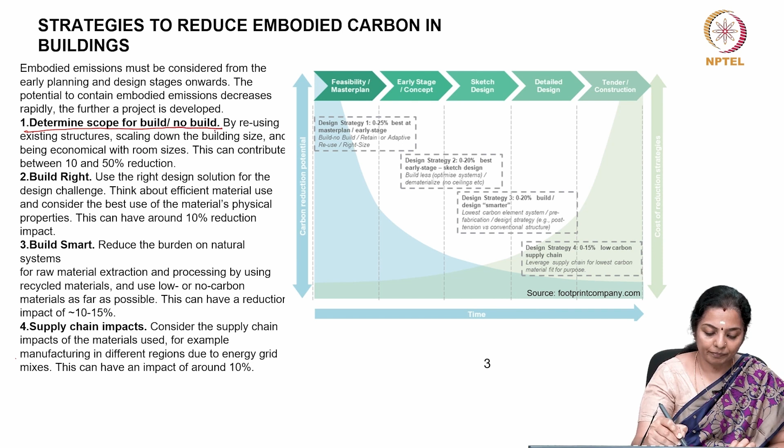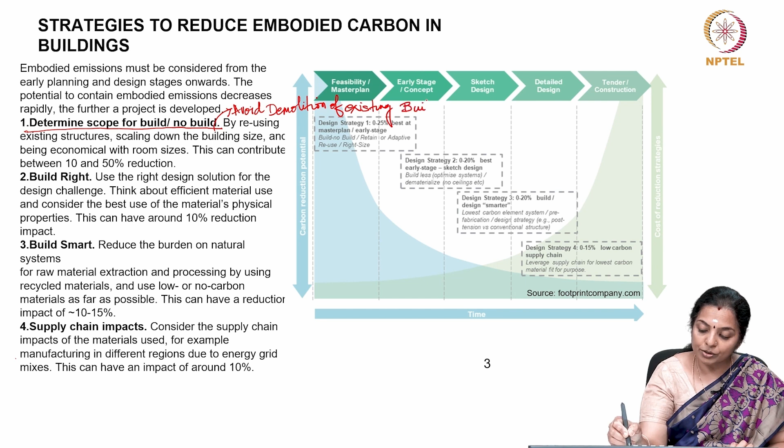The second aspect is you need to build right. So, first is to determine the scope for building, not building, maybe avoid demolition of existing building, and also retrofit of existing building. So, this is the first one. The second is to build right.

Now, we must deliberate and get into the right design solution for that particular design challenge. Think about efficient material use and consider the best use of the material's properties. What I mean to say is, if for that particular problem the solution lies in a material which has less embodied emissions, we must be able to advise the client to go for the alternate building material or alternate construction technology rather than pumping in more of the material.

For example, if M20 concrete is sufficient, then we must advise the client that there is no need to go for a higher concrete strength, because it would mean higher embodied emissions. Just this decision can have an impact of 10% on the emission reduction. But again, this must be implemented at an early design stage.

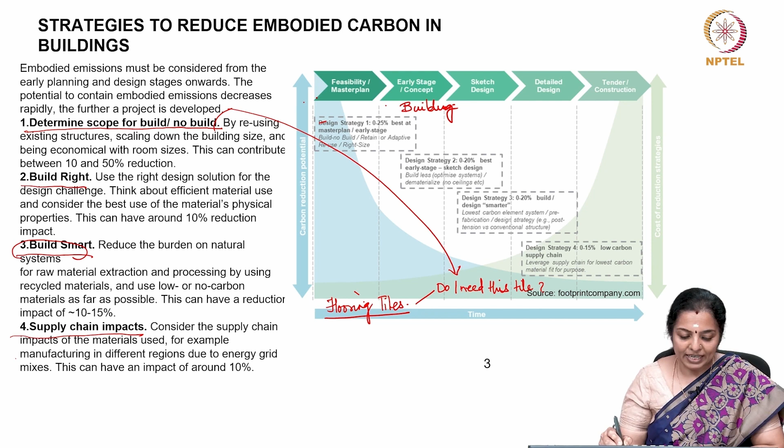For example, you need to lay flooring tiles. Now, the choice will come. How does this start actually? First and foremost, do I need this? Do I need this quality of tile? Can I not go ahead with in situ flooring? Thinking so would actually be this component. So first is, do I need this tile? Then second is, which material should I go for? So material use. That choice will come from this component.

Then next I would consider, can I go for either an alternate tile, or any recyclable material like construction demolition waste? Can I recycle construction demolition waste? Sorry about the spelling mistake. So, can I go for recycled construction demolition waste as an aggregate in the flooring? That aspect would relate to this.

And suppose you decide, no, you would want to go ahead with a marble tile. So, marble flooring. From where would the marble flooring come? Will I get it from the local area? Would I want to get it from Rajasthan? Or would I want to get it from Italy? What is the difference? The embodied energy and the embodied emissions are going to be stunningly high, because there is going to be a humongous contribution of transportation emission.

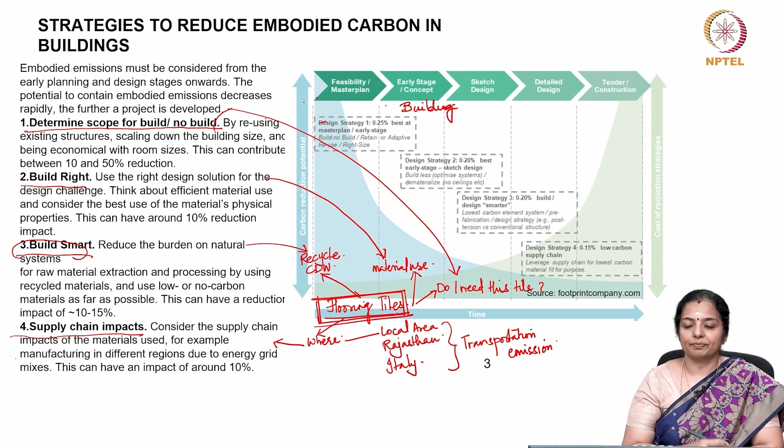So, just with one example of flooring tile, you can imagine how much embodied emissions we can reduce with appropriate choice. But again, all this has to happen at an early design stage. Then, what are the ways to reduce embodied carbon of a building through materials? The first one is we need to avoid. When I say avoid, we need to build less.

Please question the brief. It's very important to question the brief. Do I need this? Does the client need this? Or can I advise the client? You could advise the client to build less.

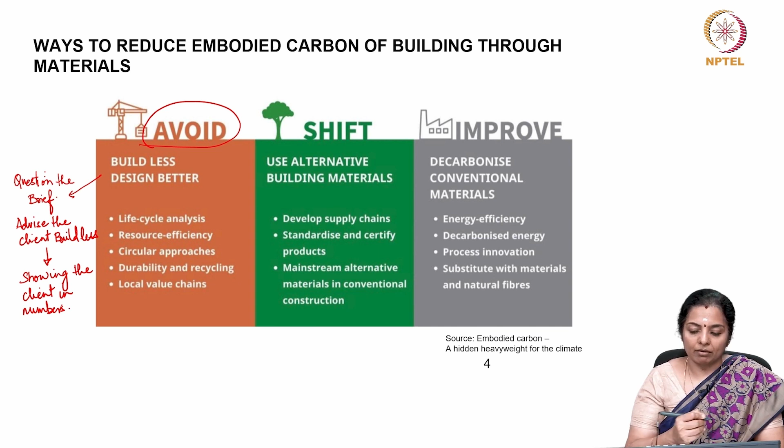And how do you do that? Or what is the way to convince the client? The way to convince the client is by showing the client in numbers the impact his decision has on whatever he takes, whether it is to build less or not build at all, or just go for retrofit.

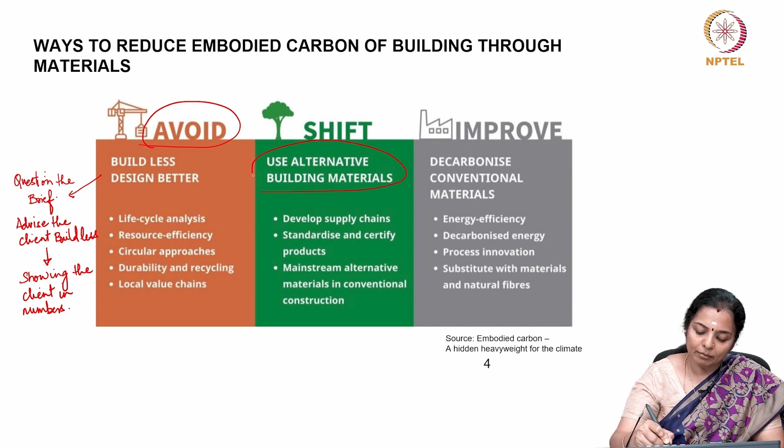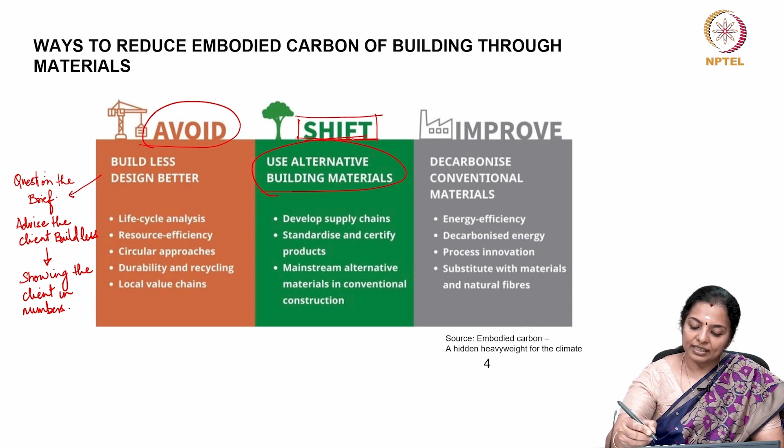Then second is use of alternate building materials. We need to have a major shift in our thinking by going into use of alternate building materials which have less embodied emissions. So, this could be in the form of using either recycled products completely as a products or recycled components, or it could be in the form of recycled building materials in that component. Also, trying to go local.

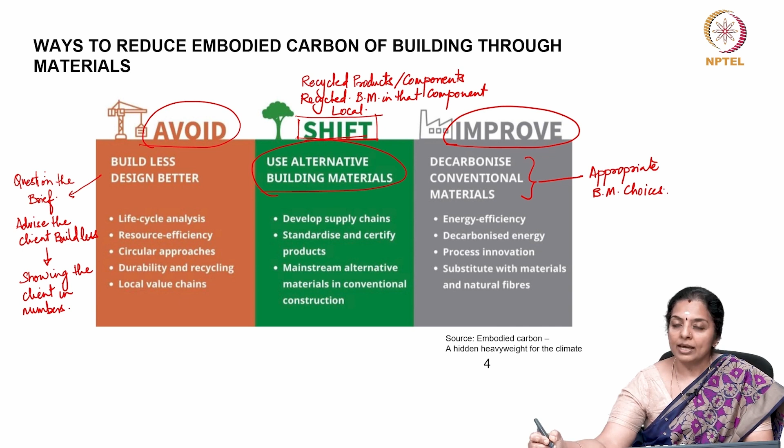Then the next one is to improve. So, the ways to improve would be to decarbonize conventional materials by having appropriate choices, appropriate building material choices. I would like to reiterate here again and again that building material choices are very important, and you have various types of building materials, but that is for another day or another course itself completely.

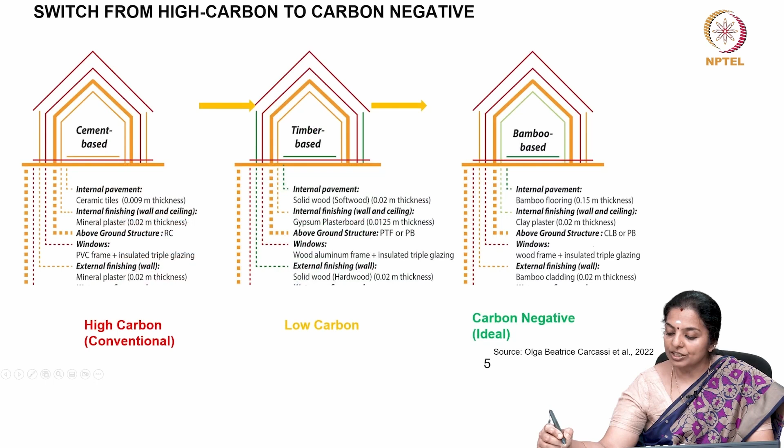So, appropriate building material choices in the form of the actual material, in the form of source of the material, whether it is local or whether it is from some other region of the country or it is from some other region of the world. So, the transportation energy also increases, and also the construction technology, which we rarely talk of. So, the construction technology is another important component. So, a little brief on this will come in the following classes, but a lot more on this will end up in another course itself. So, we need to take care of all of these.

So, to reduce the carbon footprint of building materials and construction, we need swift action to reduce the carbon footprint of conventional building materials while increasing the market share of bio-based or agro-based building materials. There is no either this or that approach. Both approaches are necessary.

Concrete, steel, glass, aluminum, plastics and other modern, or now I would even say conventional building materials, considering the scale at which we are using it, these still dominate the current models of construction. So, with these materials there is no way around addressing emission issues, but we should definitely consider more humane ways of handling the nature by our decisions of appropriate building material choices.

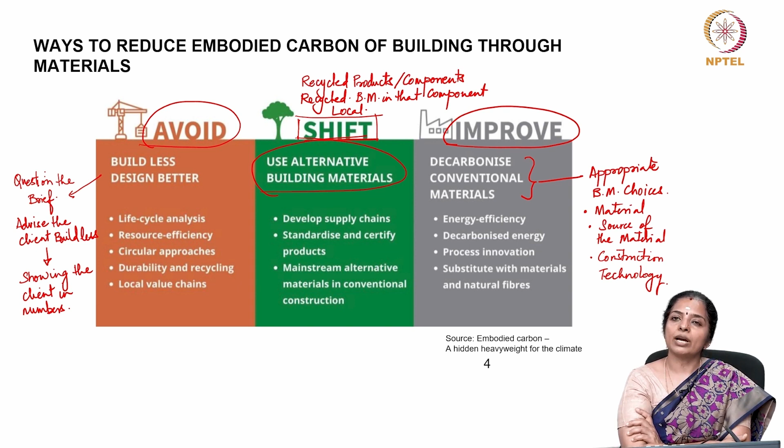And also, you should make appropriate building material choices such that you include more of recycled component, and you must improve your material choices by going in for decarbonized materials. Decarbonized materials are materials which have low embodied carbon and low embodied emissions. What these building materials are, we will see in the forthcoming classes.